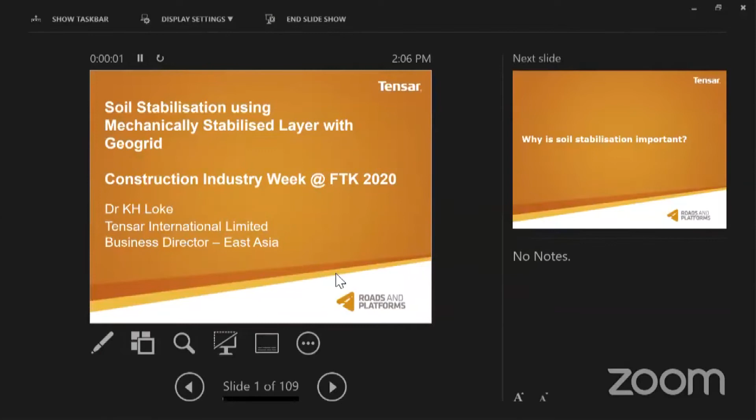So can you see my screen now? Not yet, not yet. Let me just, or should I share my screen? Hang on. Okay, I thought I already shared my screen. One more time, can you see now? Yes. Okay, now you should be able to see. All right, that's good. And I'm just going to do, what do you call that, display setting, duplicate slides. Right, so you can see the big screen right here. Let me just hide the video panel so that it's very clear.

It is very exciting to see a lot of invited guests in this construction industry week. It's a great organization. Congratulations to the team for putting these few days of organization together, and I think this is a great effort. Again, my congratulations to all of you who have made this happen.

So the topic of the presentation today is regarding soil stabilization using mechanically stabilized layer with geogrids. Now the topic itself has got several key phrases, for example, soil stabilization — I'd like you to remember that word very carefully. The other word I'd like you to remember is mechanically stabilized layer.

And lastly, the word geogrid. Don't be discouraged if you don't understand what geogrid is. I will show you some examples, and in this presentation I will go very slow. It's a structured presentation, and I'll show you a lot of videos of the application as well.

The question here is, why is it so important to have soil stabilization? We talk about ground improvement, we talk about reinforcement - those are beautiful terms, synonymous to ground improvement. But not many people have really heard about soil stabilization, or the word stabilization is used wrongly. This is what we try to correct, or what will be the objective of this presentation.

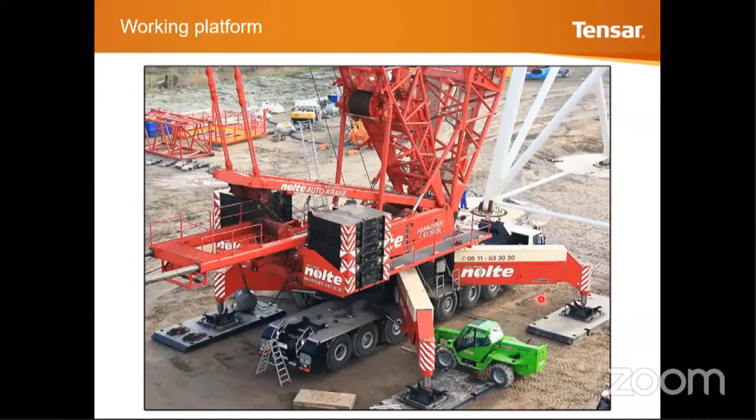So why is it important? You may come across applications like working platform. You can see here the working platform. If you compare the size of this truck, just imagine how small a human being is compared to huge machinery like this. If you do not have a firm foundation or working platform, you will not be able to support this vehicle, and it will just collapse and not work. That is why stabilization of the ground is very important.

In fact, you may ask, is there a design or guide for working platform? The answer is yes, there is a design, and I'll show you one example here. This is the European Federation of Foundation Contractors, the EFFC/DFI - DFI simply stands for Deep Foundations Institute. So you have a document here to teach you how to actually design a working platform.

What is interesting here is this little picture. This is a European document, and if you notice this picture - I don't know how many of you would notice - when I checked back the record, it shows that this picture is actually from Malaysia. It is actually a tragedy that happened back in 2016. Unfortunately this is quite common in the construction industries we are facing in our country.

You can also see in that document, if you look at the appendices, a ground engineering magazine talking about bearing capacity of a geogrid stabilized granular layer on clay. So there is a design method already in place, published in 2019 by Lee and Matthias. It's not uncommon that we don't know about geogrid stabilization, yet it's already a published document. Any students graduating soon and coming into the industry, I would strongly advise you get hold of this document.

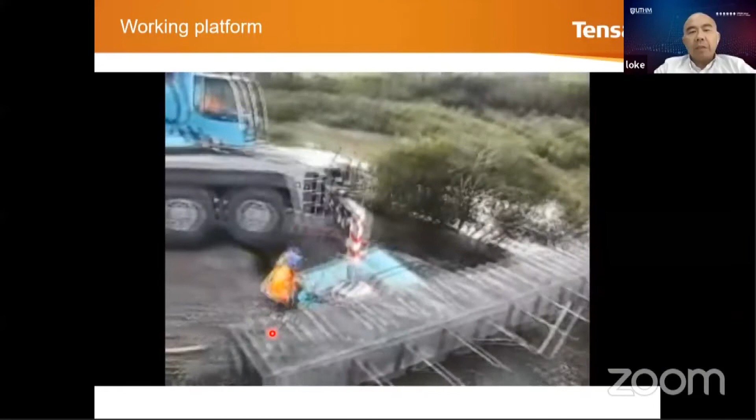Then you have a problem if you do not really take care of the foundation or working platform where the heavy vehicle is going to be supported. So you've got conditions like that - this is really heavy equipment, a construction in a wind farm. I'll show you why it's so important to have a good working platform, because it's going to save a lot of time as well as money.

And also for subgrade stabilization, you can see rows of geogrids have already been laid out over very, very soft material. This is actually a project in Korea, whereby the client is trying to develop an industrial area, but getting access to the site is completely impossible.

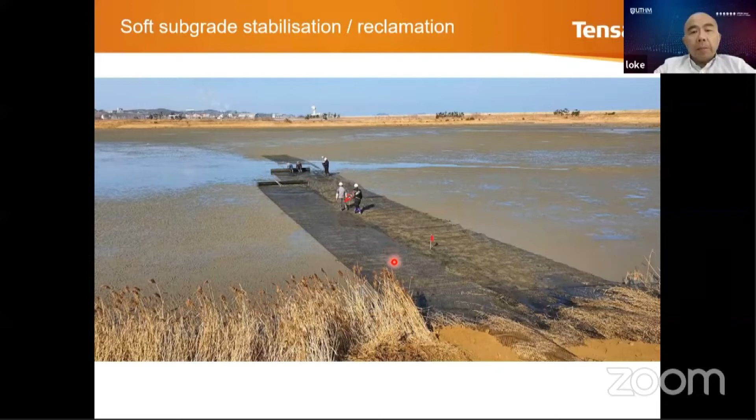What has been done here is to lay a geogrid. You can see the footprints over here. I may have some other photographs to show you later on, for road constructions. And if you notice, these are all the loading coming from the top.

So your geogrid is laid, this is how the geogrid is laid. And then you have got your construction vehicles lying on top, and you use your aggregates or the base course material, which is a very good material. And there are reasons for why you're using such a good material over the geogrids.

So this is what we're going to talk about in our presentation today. We're going to look at the performance review. It's very important - the word performance here is actually the most important thing.

Sometimes if you look at the whole design alone, you have to depend on what we call empirical design. Empirical simply means that you run real trials and you look at the results. You can't actually make an equation or have a formulation - it's quite impossible. And through the performance, then you try to make a formulation out of this. That's why we talk about performance.

A lot of projects, for example the design of road pavement, is all purely empirical. And so is design of geogrids for pavements. It's all purely empirical. In other words, we put the road to a test.

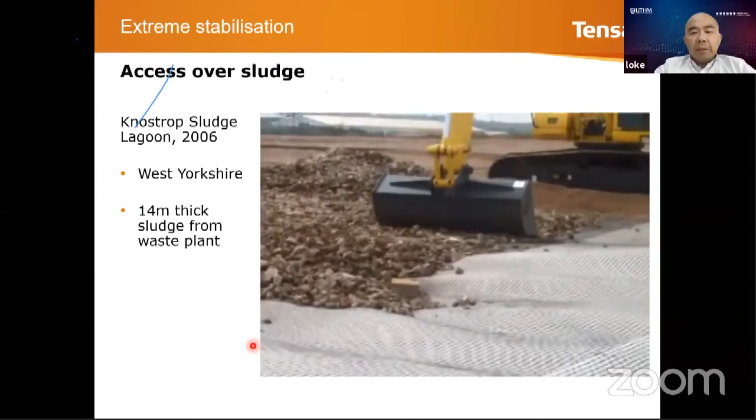And you can see that this is a geogrid, and you also have what we call a load, and you have got construction vehicles over it. Okay, and you can see that the soil is very, very soft. Here is again another performance.

So in this layer, I'll just stop it for a while. Oops, sorry, just go back. If I can just provide you some background.

So here is only about 300 millimeters of fill aggregates, and below is actually a layer of geogrids, the one you saw in the train ballast. And further down, if you see this particular dump truck, this is about 55 tons.

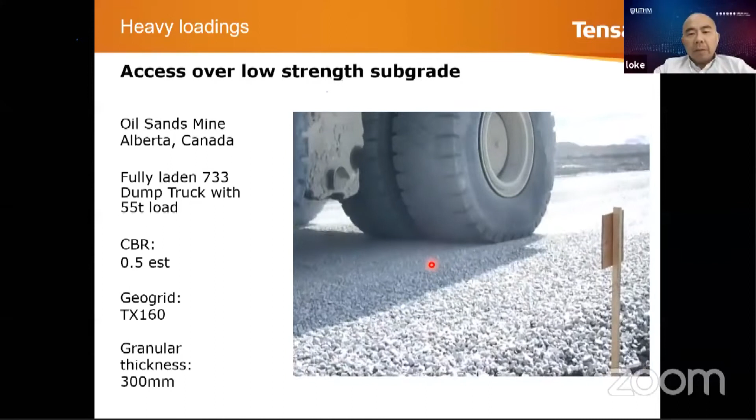So you don't see any movements of the stones at all here, it's very stable. And the section without any geogrids, you can see that you have got a lot of rutting, trucks simply wouldn't move at all. Okay, so there's a big difference.

Here, the stones are all displaced, but the stones over here, whereby you have got geogrids, the stones are not displaced at all. They are confined, interlocked, held together, and they don't move. If you look at the stones here, they are completely displaced, and when they are displaced, they become thinner, and therefore the aggregates will not be able to support this particular vehicle anymore.

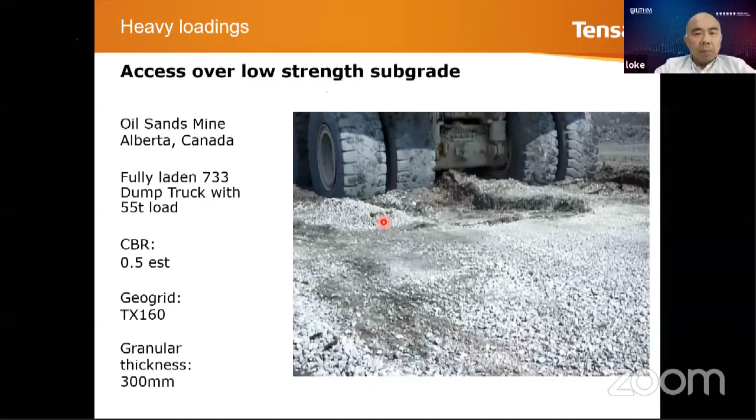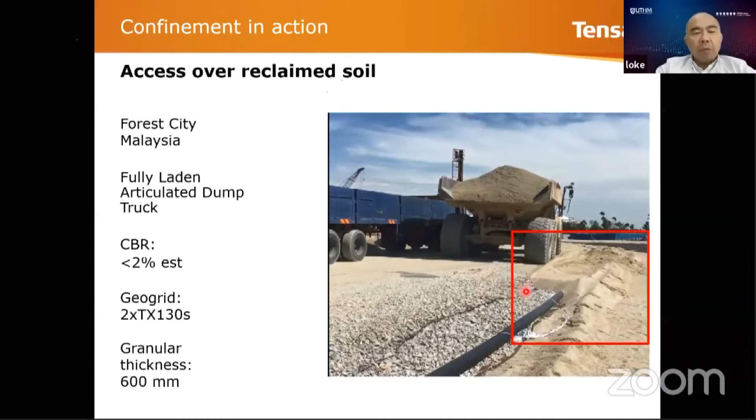And you can see that the vehicle is very close to the edge. And even though it's very close to the edge, you can see very little movement from moving away from the roads. So very little movement of the stones moving away from that pile. Okay, so that's what we talk about as performance.

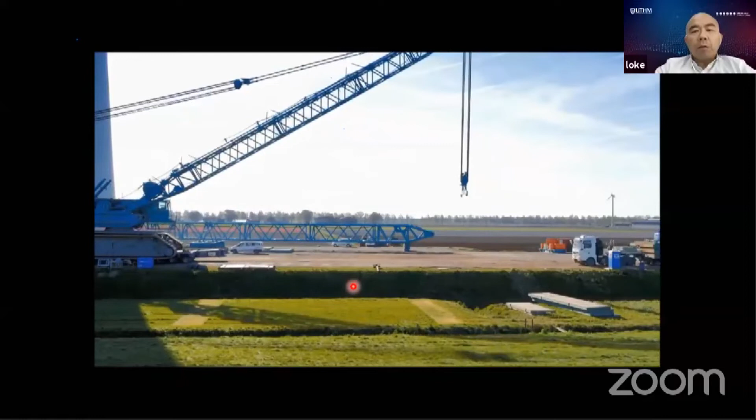Now, this is also a very interesting project. I showed you the big vehicle earlier. For this particular vehicle, to mobilize and demobilize, it will take you 14 days. So you got to dismantle this vehicle. You have got these trucks transporting all the parts to another project site in a wind farm, and then they have to reassemble it again. So the mobilization and demobilization part takes about 14 days.

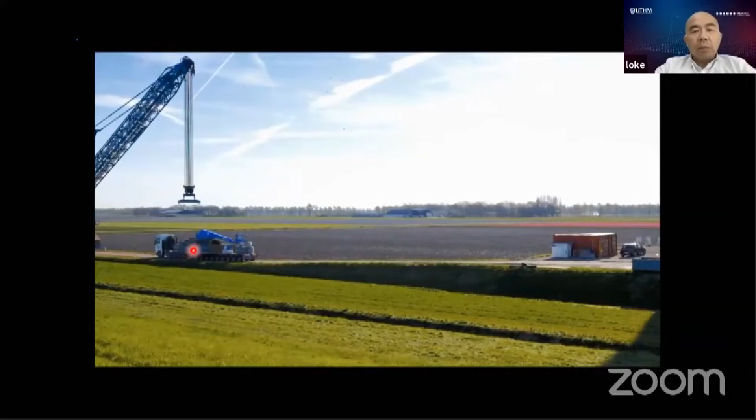Now, with the geogrids that we can actually provide for a good access road, this machine need not demobilize. They can actually move on the road. And you can see this movement. If you look at the size of a human being, it's very small. Even this truck is very small compared to this giant, which is actually used to carry the wind turbine. All right, so this project is actually in Holland.

There are numerous case histories to show the workability of soil stabilization using geogrids. So what geosynthetics are normally used in roads? This is an important question that we normally ask. And I just want to show you some of the geosynthetics.

So typical solution is that if you have a soft clay, you step over it, you will sink. And if you know that if you have got a wooden platform, you step over it, it will actually float. And the reason for that is because this wooden platform is able to spread the load to a wider area and therefore reduce the pressure, and then it's allowed to support the load. Now, remember that this wooden platform is one whole homogeneous piece, it is intact.

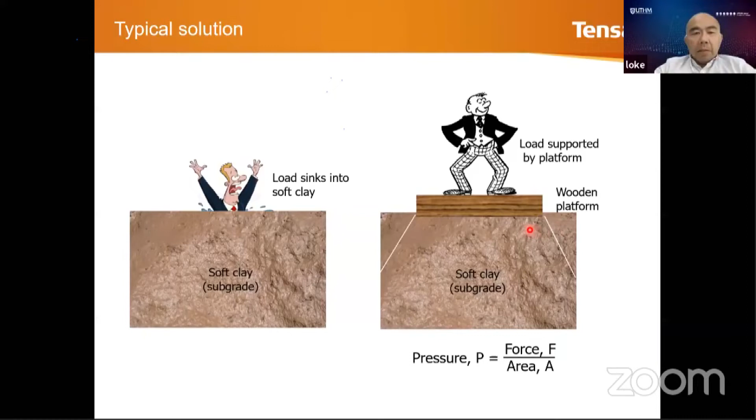But when you talk about a material which is basically a fabric, a geosynthetic, if you put it close to the soft subgrade, you will still have the similar effect, provided that these geosynthetics will not deform. And in most cases, if you put a layer of geosynthetics here, it will deform in this manner when it is loaded. So when you have got loading, it will not be straight, but it will deform like this.

Only when it deforms, then only it will mobilize the tensile strength, and then it will be able to support the load. Okay, but a lot of engineering drawings, you will see that it is a straight line. It doesn't work that way. This is exactly what is happening when you put a geosynthetic material in between a soft ground and a sub-base material. You will have to deform.

The question here is, do you want to have this deformation at the top? Can we tolerate that kind of failure? Right, that's the question. And in most cases, if you are looking at the working platform, if you are looking at heavy crane access, or for roads, paved roads, we cannot tolerate that kind of huge deformation.

And that is why we must have something which cannot deform so much. It's very important to identify the geogrids or the geosynthetics that will help you to do that.

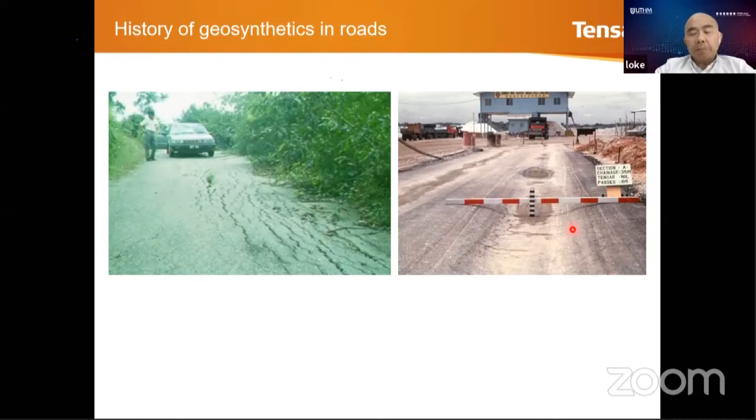We cannot have this kind of performance, especially for important structures like pavements, heavy duty pavements, cranes, access working platforms. We cannot have this kind of deformation. So let's look at the variety of geosynthetics.

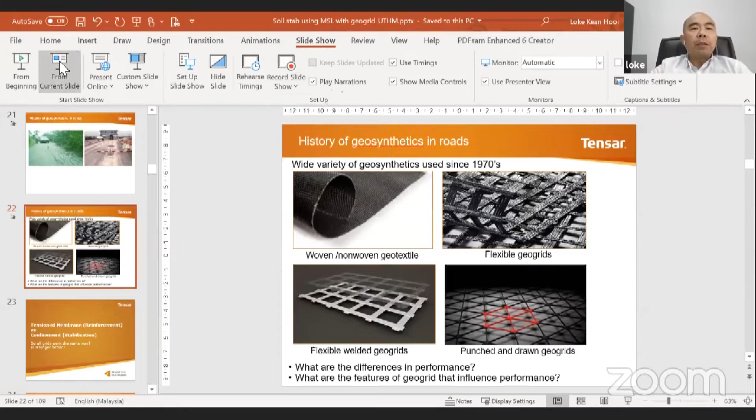So the most important thing here is to look at the junction. You can see the junction here is very strong, same thing as this particular junction. So if you imagine a road which is carrying vehicles and the vehicle is coming from the top, you know that when you have got something at the top, it will deform.

So it's very important that we look again at the mechanism of loading. Let's proceed on with the presentation, I'll show it to you. So what are the differences in performance? That's what we want to find out. What are the differences in the performance? And the next question we want to ask here is, what will be the features of the geogrid that influence the performance? What properties of the geogrid are important for the performance?

So the first one we want to ask is, what is the difference in performance between flexible geogrids or flexible geotextiles compared to stiff geogrids? And then if the stiff geogrid is better, what are the properties that influence the performance? These are the two questions we try to answer.

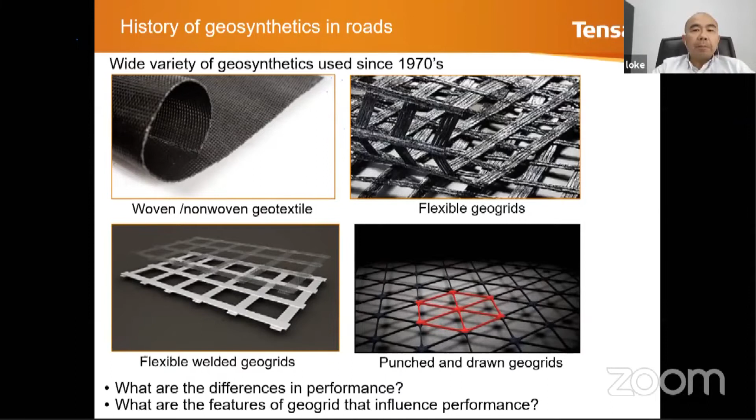So we look at tension membrane, which we call reinforcement, and the other one we call stabilization, which is confinement. So to answer Dr. Hassan's question earlier, which function is better? We will look at it and I will tell you which function is better. And again, it depends on what performance that you want.

So I also note down questions on the slide here. Do all geogrids work the same way? Is stronger better? And this is where, as engineering students, when we come out, every time we see strength we say, oh, this material is very good. If we look at concrete or steel, we say, oh, they are very strong. Is strength the criteria or is it not?

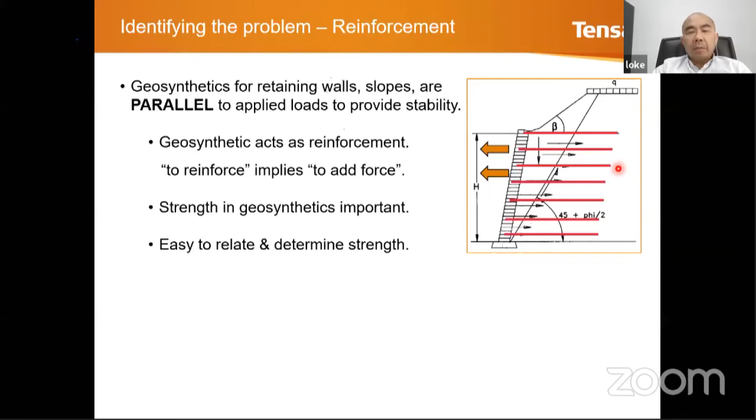If you look at the reinforced slope or reinforced wall, this is how we analyze it. Strength becomes important, so you need higher strength to resist any failure. That's what we found out in our soil mechanics class.

But for the road or working platform, it's different. The direction of the load is not the same as the direction of the geosynthetic. The direction of the load is down, and the direction of the geosynthetic is this way.

So does strength now become important? I demonstrated to you holding up the various geosynthetic, and as I press down, you can see that no matter how strong the geosynthetic is, it is not going to hold the load.

If you can still see my samples, this is my samples. This material is very strong. If I pull it this way, it's very strong compared to this material. So the tensile strength of this is more than this.

But when you apply the load this way, this performs better than this. You see the difference now. So it depends on the direction of the loading, and that's very important. This has been well researched.

You can see that it is very difficult to explain why reinforcing the road doesn't work. You don't reinforce the road, you stabilize the road. And this is very important.

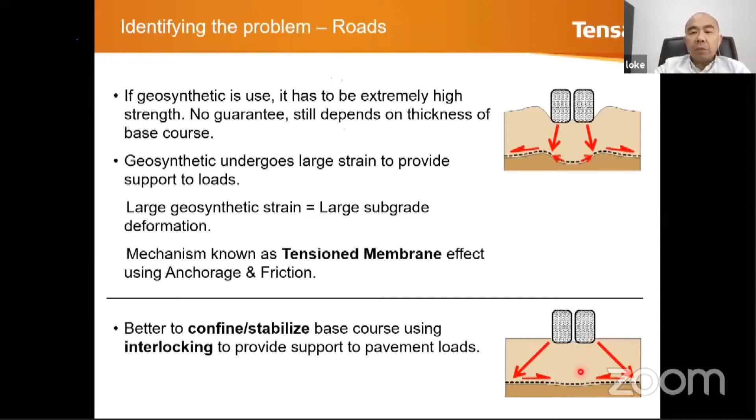How do we do that? By restricting any movement of the soil here. If you look at this, once the soil enters into these holes, it is held together by the geogrid, it cannot move. So the stiffness of this material is strong and it cannot move. So when there is no displacement, then there is no displacement at the top here where the wheel load is.

Let's look at some of the videos and it'll help you to understand better. So this is what happened, you see?

The big difference between a geotextile, which is soft and flexible, you have a tension membrane effect. If you use a stiff geogrid, even though its strength is lower than this strength, it performs better because it has stiffness and the ability to interlock. This mechanism is what we call stabilization. That's a key word here in today's presentation when we talk about stabilization geogrids or mechanically stabilized layer.

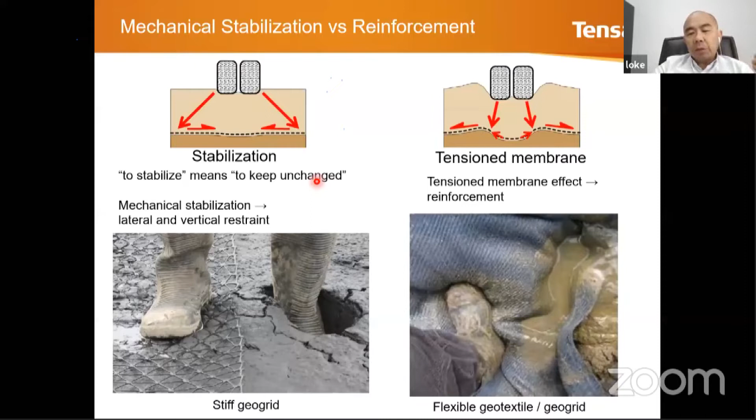So a tension membrane works like a hammock. How does a hammock work? The hammock only works when you put a vertical load. Once you put a vertical load, then the hammock started to strain and it started to stretch. When it started to stretch, this is where the reinforcement ability or the tensile strength of the hammock comes into play. But it has already deformed, okay?

And that's what we don't want. We don't want deformation, or we try to minimize deformation. So reinforcement of the geogrids will take place when you have got a tension membrane effect, when you have got reinforced soil structures. However, stabilization of the geogrid will take place especially for road construction - you need stabilization, or when you have got a change in boundary and embankment, or to limit any slip surface failure.

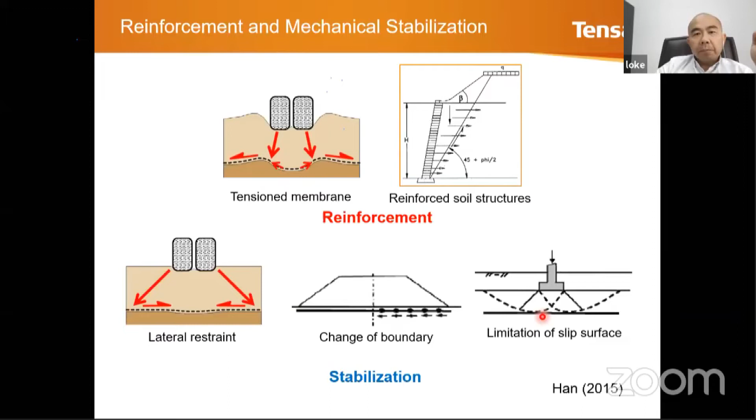How do I play these videos?

Why can't I play these videos? Yep, okay. And to position the fabric.

So rolling it out straight was almost impossible. It's difficult. And in the really soft areas, the crew found themselves in a bit of difficulty.

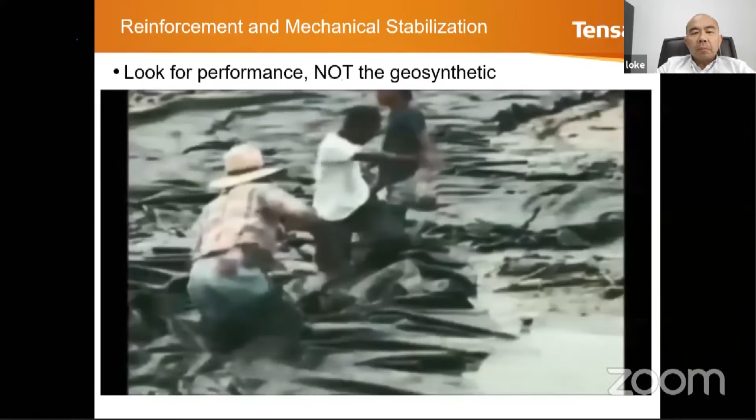With Geogrid, it was a different story. Only 2 men were needed, and it supported their weight with ease. You can imagine how difficult it would have been to try to sew the fabric under these conditions. On the actual levee construction, 1 man could position the grid, 2 roll it out and overlap it. Unlike a geotextile, no sewing is required.

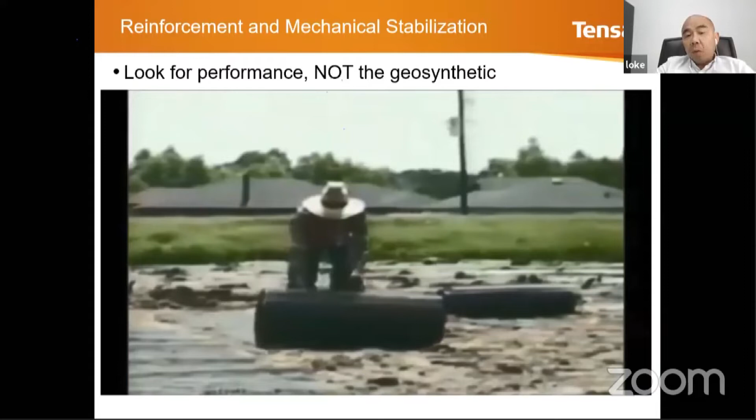So you can see the difference. One with the geotextile, which is very high strength but very poor stiffness, and you can't work at all. The other one is a geogrid, which has got lower strength than the geotextile, and you can see that it works perfect. Why? Because again of stiffness.

As long as the loading is from the top or is not in the direction or parallel to the geosynthetic, strength is not the design criteria. So do not design on strength.

Many people ask me in my whole career in geosynthetics, they take a geotextile or geosynthetic material and show it to me and say, oh, this geosynthetic material is 80 kilonewton, how does it perform? To be honest, I don't know.

All I can tell you is that if I look at the material, if it has got very little rigidity or stiffness, then it will not perform. Yet still, we have seen engineers designing for road pavements, for platforms, for soil stabilization, everything looking at strength. And strength is never in the equation.

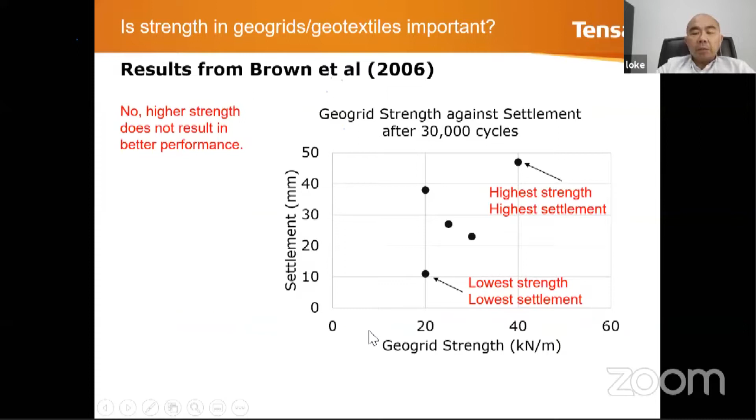So you can see here, as I've illustrated very clearly, geogrid with strength which is lower than a higher strength right here perform much better compared to a higher strength geosynthetic. So there are 2 definitions.

In fact, it's very clear, this is published in ISO 10318. So what is reinforcement function? Reinforcement function is the use of stress-strain behavior of a geosynthetic material to improve the mechanical properties of the soil or other construction materials. Remember that. It is the use of the stress-strain behavior of the geosynthetic to improve the mechanical properties of the soil.

Now look at the stabilization definition. Stabilization function is the improvement of the mechanical behavior of unbound granular material, meaning the granular materials are loose, not bound together, by including one or more geosynthetic layers such that deformation under applied load is reduced by minimizing movements of the unbound granular material. You see that? There's a big difference between the stabilization function and the definition for reinforcement.

Stabilization talks about movements of the aggregates. That means if you can restrict any movements of the aggregate of the granular material, then you have less deformation. And that's how it works in stabilization, by restricting movements of the unbound material. And that is very important. If you can understand that, then you can understand stabilization.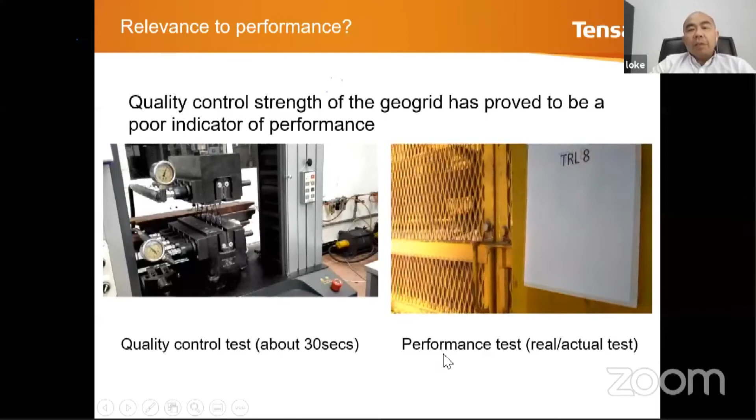This is a performance test. You put the geogrid into the soil, then you run the test. This is what you have done. You run it for many passes and then you check the rutting. What is the depth of the rutting? Is it deep? How much does it form? By doing that, you will know the performance.

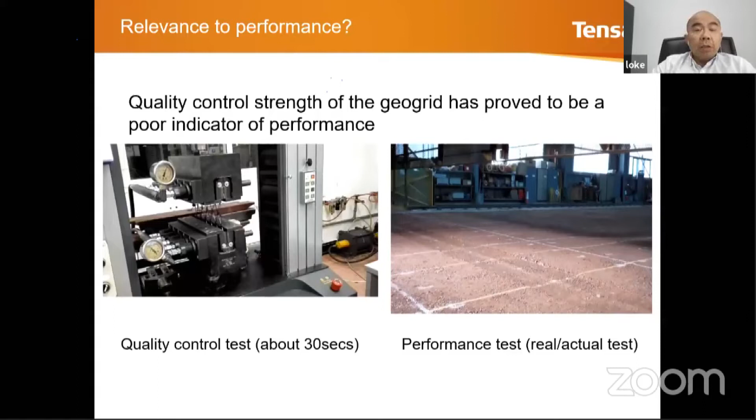So if you look at this with the geogrid, you can see the road is very flat. It doesn't deform a lot. You can draw a conclusion to say that this test actually worked. The road is still good. This is what we call a performance test.

So the key performance indicator is very clear, the answer was given to you already, it's deformation. So we look at the deformation. If it's deformed very badly, we say it doesn't work. If it doesn't deform, then we say that the geogrid works.

As I said, in the AASHTO guide you can see tons and tons of different kinds of trucks, different kinds of tandems, different kinds of wheels, different kinds of axle loading. What AASHTO did in 1958 to 1960 is run this truck up and down, there's a circle here, they run it up and down and see how it performs. That's exactly what happened in 1958 to 1960s. They just trafficked it up and down along this stretch using different kinds of vehicles, and then they formulated what we call the AASHTO guide for the design of pavement in 1993.

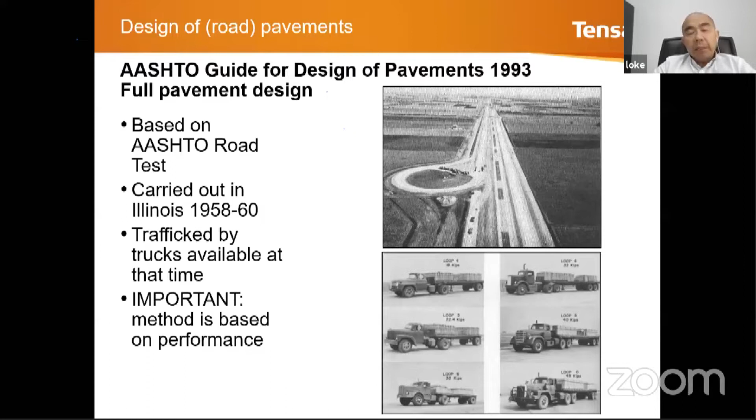And that's how, again, purely empirical, based on performance. So what we have done over the years, over 30 years, we have done more than 80,000, and sometimes exceeding about 1 million ESAL. ESAL stands for Equivalent Single Axle Load. We have done so many trials from 1992 all the way to 2014, and you can see these are all performance tests, in order to determine the performance.

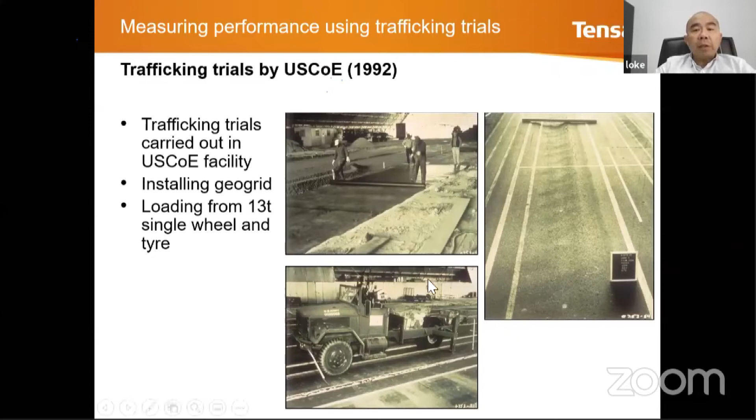So the first performance test in 1992, at the very start, what we have done is we have done it with these particular geogrids, which are biaxial geogrids. And you can see the performance right here. So these are the geogrids, the SS2 and the SS1.

You can see that if we take a deformation of about 25 millimeters, you read the graph across here. Just to give you a little bit of context, if you are using a geogrid like this, that's the PET1 and PET2. Control has got no geogrids at all. A PP geogrid will be something like that. And then you have got the SS geogrid, which is something like this.

So this is the performance. You can see that at a very small number of passes, you already have very deep rutting. Whereas with a stiff geogrid like this, you can see the rutting is at the same level, but the number of passes is much, much higher. In other words, you need more passes to give you the same rutting of 25 millimeters. So you can see here, the performance of a stiff geogrid is much better compared to a flexible geosynthetic material.

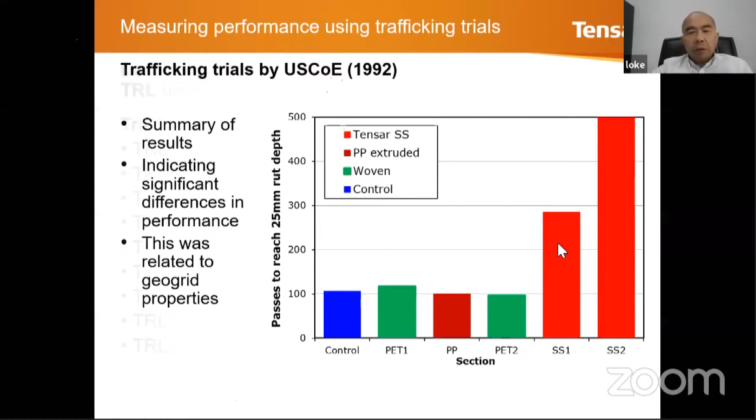And then we go into a full trial, which we call the TRL, in the UK. You can see a lot of sections that we have done, stiff geogrids and different kinds of geogrids. I've shown these particular facilities for you, and there's a lot of literature and publications of these tests.

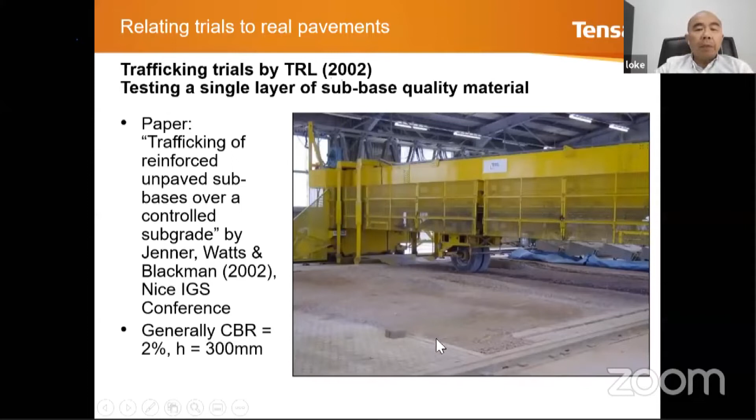These are done generally at 2% CBR, which is about 50 kPa in terms of undrained shear strength, and the thickness of the fill material above the geogrid is about 300 millimeters.

Now, if the deformation is at the top, it's still okay, because you can top it up. But if the deformation is at the bottom, it will cause more failure to the structure, because you cannot top it up - you've got to dig it down and repair that section. This is what we try to avoid.

All right, so from this technology, science has developed and moved into this particular technology. So why do we have a hexagonal shape?

The reason we have a hexagonal shape is because as a wheel load is exerted upon the geogrids, it's actually generating a radial stress, and a hexagon is very close to a radial stress, round. That is why the geogrid is formed in a hexagonal shape.

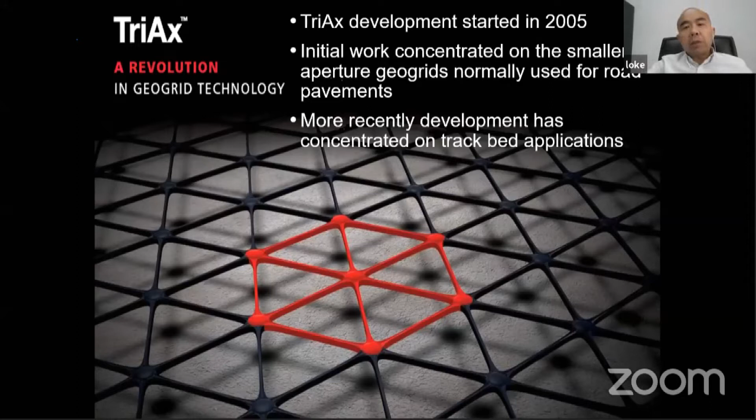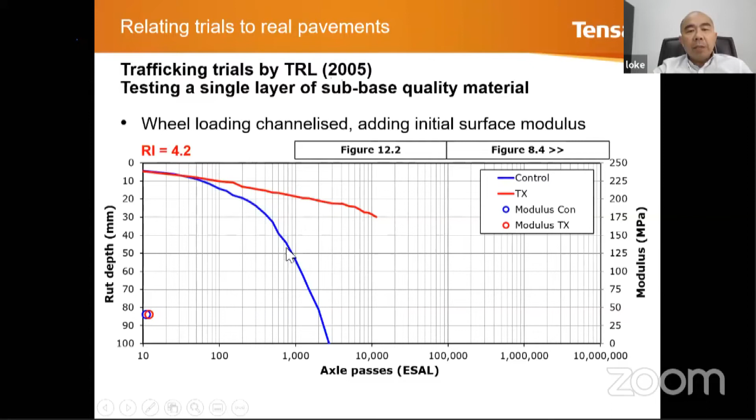So you can see that this is very clear. This chart is plotted against gross loads, whereby you have the number of axles. So when we talk about a permanent road, we are talking about in this region. 10,000 passes is still quite low - you can see if you don't have any stabilization geogrid, the road already failed.

All right, so there's a difference now. The control, you can see, failed very fast. Then you have a square type of geogrid, which I showed you, which is not performing so well. And then you have a triangular or hexagonal shape of geogrid, and it performs much better.

You can see that if you take a 25 millimeter settlement deformation, it performs about 6 to 8 times far better than the square geogrids. This is the technology we want to share with you in this presentation.

So we moved on now to a more critical or higher loading, and this is where we use the US Corps of Engineers trial. In this trial, you can see this big truck moving along the road.

And inside here you can see this mechanism moving - this wheel is moving inside this big truck. It's a very expensive test, but a very important test. We call it the APT test, Accelerated Pavement Test.

This is a very important test because you can perform it in a controlled environment - you can control the moisture, control the temperature, and allow the wheel to run not channelized. You can run here and then move to the other side and run again. You can construct a road, and after that drive this vehicle over the road and perform the test anywhere you want.

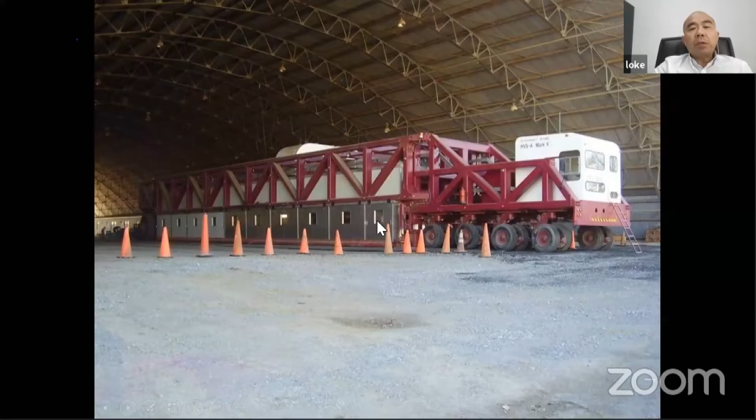So inside this particular truck, this is where the wheel is. It's a very heavy wheel and it's not channelized. In other words, the wheel can run in this track or it can run in the track later on, so it can vary the tracking. The wheel can run along here or run along here or run along here.

So this is the test, and these are very interesting results. What you can see here is a control section with 50 millimeters of asphalt. The deformation, the rut depth, is 50 millimeters after only about 20,000 passes. And then you increase the thickness of the asphalt to 75 millimeters - it doesn't help at all. At 20,000 passes, it has already developed about 20 millimeters of rutting. And remember, you increased it by about 50% in terms of the asphalt, and asphalt is very expensive.

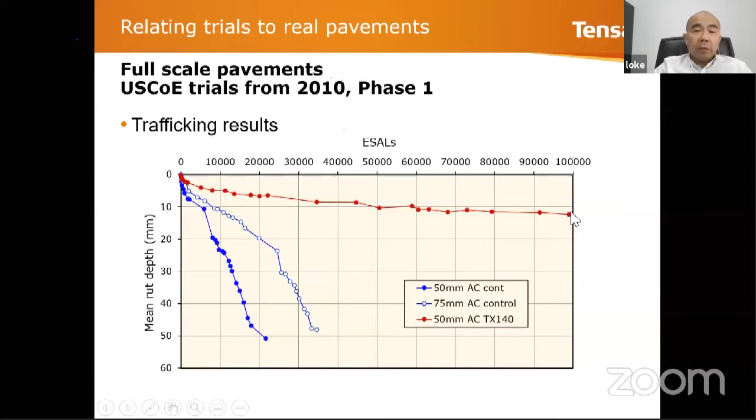What you can do instead is add a layer of geogrid. Using 50 millimeters of asphalt, you can see that it can go on until 100,000 passes with a rutting of less than 12 millimeters. And that is a very interesting and well-performed trafficking result. So you can replot these in the Austroads chart.

We carried out another test, this one with the Louisiana Transportation Research Center, and this goes way beyond the 100,000 passes, which is right here. What we did here is a plate load test, up to 4 million passes, and this is the real McCoy, if you like. This is where the real things are happening - the actual roads happen around here, not here.

You don't have a road whereby the number of passes of traffic vehicles is less than 1,000. And this is where you can see again, we have somewhere about less than 15 millimeters of rutting.

So I mentioned to you what I mean when somebody comes to me and says, 'I've got an 80 kilonewton tensile strength geosynthetic material, how does it perform?' My answer to that question is, I don't know, and I tell you it won't perform - it will rut. But if somebody comes and tells me, 'I've got a geogrid which can interlock and has very good radial stiffness, how does it perform?' I can tell you, most likely you will have rutting not more than 20 millimeters after maybe 100,000 passes. And this is what we experience, and these are the results.

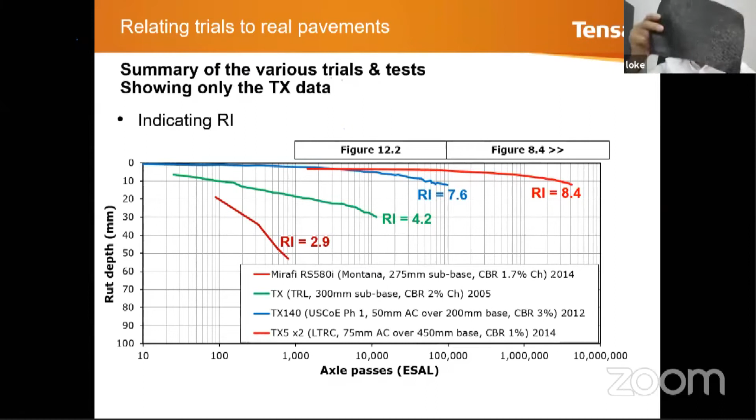This material has got higher tensile strength than this material. So what is the magic? That's what we try to explain to you.

Let's look at mechanical stabilized layer explained. This is the real show. Why is a geogrid, which is stiff and has got holes so we can interlock, perform better than the geotextile which does not have holes and which is flexible? Look at this, it's a very interesting demonstration.

If you look at these two, the first thought you would think is this looks like a stone. Indeed, it is a stone. But actually it's made from plastic and shaped like a stone, and inside this plastic we have got translational sensors and rotational sensors. This is how we try to simulate rock ballast for railway.

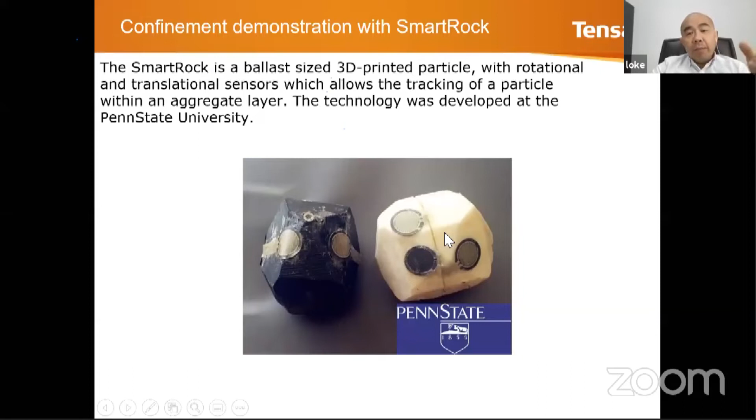So when we have got these stones, we can track movements. This research was done actually at Penn State University, and I just want to show you this video.

Look at it very carefully. Let me stop this first so your eyes won't get distracted. You can see that as I turn the rock, I can look at it on the screen. So if I do a rotation of the rock, which has got sensors in it, you can see the rotation of the rock on screen. Now if I do a translation, jumping it here and there, you can again see the movement of the rock on the screen.

When you look at this, you will say, wow, this is fantastic. Why? Because now you can actually see what actually happened in the road. If I take these rocks and put them together with the real rocks in the road or in a railway track ballast, I can actually track the movements of the rock. And this is exactly what we have done.

If you look here, this is a piston, an actuator. Let me stop the video for a while. We applied this on the railway track, and these rocks are placed directly above, about 10 centimeters above the geogrids. In one layer, the rock is placed where there are no geogrids, and in one section we place the rocks directly above the geogrid, about only 10 centimeters above it.

So what are the features that influence geogrid performance? We also ran tests at the University of Nottingham, and for those interested, there's plenty of literature to read. So why does a square geogrid not perform as well as a hexagonal geogrid?

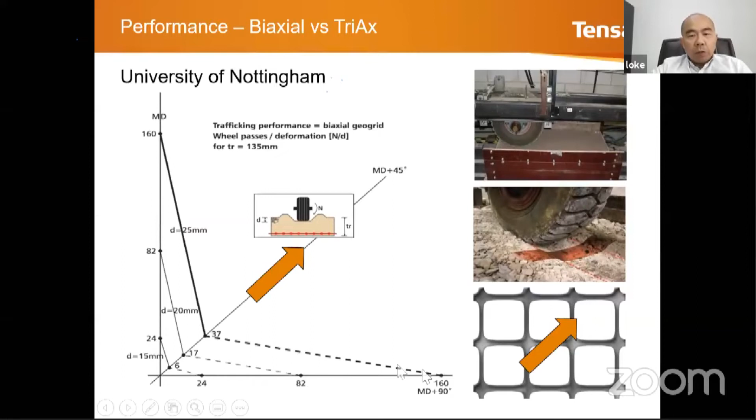If I take this quadrant and make it into four quadrants, I get this shape - you see this, which is the same as this. And if you look at this one quadrant for square geogrids, and put it into four quadrants, I get this.

Remember, there are two questions you want to answer. First: what is the performance of the geogrid, and what are the differences in performance? Second: what are the properties that give you better performance? We already know the answer to the first question - a multi-axial or radial geogrid performs better. So the second question is: what properties drive that performance?

The properties we need are: number one, you must have radial stiffness. Number two, you must take the ratio between the higher stiffness and the lower stiffness. That ratio must be more than about 0.75.

Maybe I can explain this better using a bicycle wheel. A bicycle wheel has a tire wheel that's very thin - if you look at a racer bike, it's very thin. Someone weighing 200 or 250 pounds can ride on it and the wheel doesn't collapse. Why? Because the bicycle wheel, even though very thin, is held together by what we call the hub.

You can see all these wires - this is called the spoke. The spokes are very thin but connected to the hub very strongly, and each spoke has equal stiffness. Now imagine if one spoke has low stiffness, or if this junction connection is poor - the whole wheel will collapse. That's the reason why the wheel, being so thin, is able to support a load of 200 pounds.

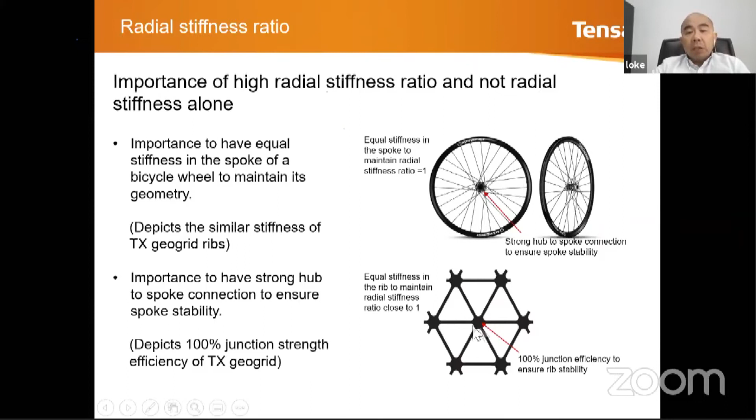And the third component of properties, which is very important for the geogrid to function as a stabilization geogrid, is junction efficiency. A wheel load exerting radial stress, and that radial stress must be taken by a radial geogrid, or close to a circular geogrid. And that's exactly why it performs over and over again better than high-strength geotextile or a square geogrid.

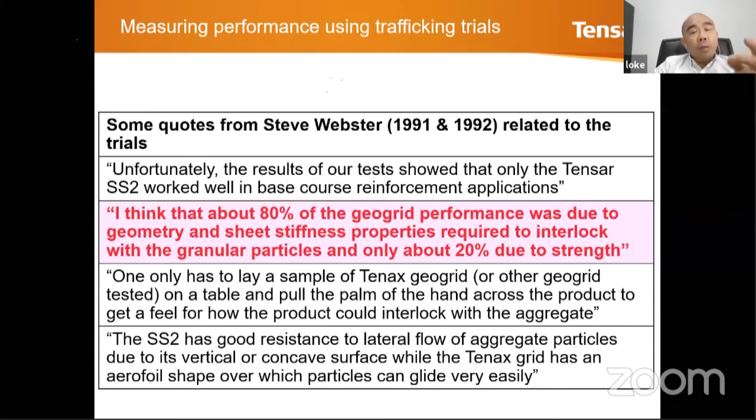Okay, so again, many tests for verification - this is one done by Steve Webster way back in 1991 and 1992, and it says 80% of the geogrid performance was due to geometry and stiffness properties required to interlock the granular particles, and only 20% due to strength. Look at this statement, a very important statement. It says that 80% of geogrid performance is actually due to the geometry and stiffness that requires interlocking of the granular particles, and only 20% is due to strength.

Okay, so the rib is important. The opening, or what we call the aperture, is very important. Square is better than round. You can see that the openings or apertures are all square - you can feel the edge here. And then you have a very high junction efficiency. Obviously you must have some kind of stability, some kind of strength. Only about 20% of the strength is enough.

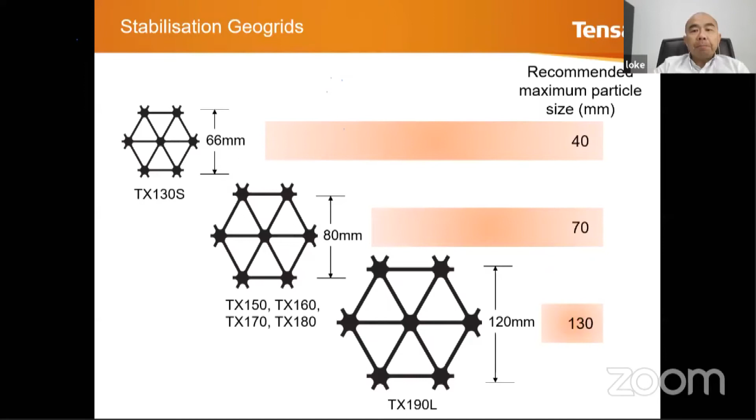Right, so that's how it looks. And it comes in different sizes as well, so you can use it to be compatible with different aggregate sizes. Here is the smallest opening size, which is about 33 millimeters from here to here. Then this is about 40 millimeters. And the largest one, which is 60 millimeters, we use for ballast railway track. It's recommended for different sizes of aggregates that you put on top of it.

So I've spoken about the performance. I've run through the tests, showing you the test. Now I'm going to talk very quickly about the design part. So how can we design it? Is there any way that we can design it? How do we get help? Yes, it's already been established.

So you can see that now we know: if I take a granular material unbound and add it together with a geogrid of this configuration, I get a composite layer. This is what we call - and this is very important to the topic - mechanically stabilized, MSL. So this becomes a composite. We call this mechanically stabilized. What do we stabilize with? We stabilize with geogrids - this is synonymous with when we add cement or lime.

You may have heard about chemical stabilization, where we add cement. So the difference between the two is that this does not add cement or any lime or any chemical - it just adds a layer of geogrid. This is why it's called mechanically stabilized.

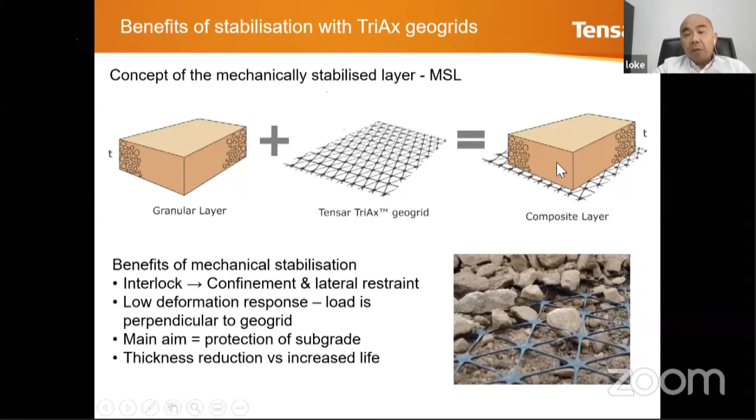Okay, so by putting a layer of geogrids, you can see that the layer at the bottom here will be interlocked. It can't move. Stiffness is there, stiffness is as good as original. When there's no movement - again back to the definition of stabilization, when you have limited movement, no deformation of the stones at all - you can see the movements in the Penn State University video. When there's no movement at all, this whole material is very rigid, and therefore you get minimum deformation.

So when we use this, we can actually save a lot in terms of construction time and also material cost. Instead of using a layer which is 1.5 or 2 times thicker without any geogrids, we can use a layer which is thinner, half the thickness, and it performs much better by giving you a better number of traffic passes.

All right, so we can design it. What we do here is we have a factor for structural number in the design. I'm not going through the detail, but just to let you know the design has been established already. So here is your soft subgrade, and this is your base course material, and normally you put an asphalt pavement over it. This is the normal construction.

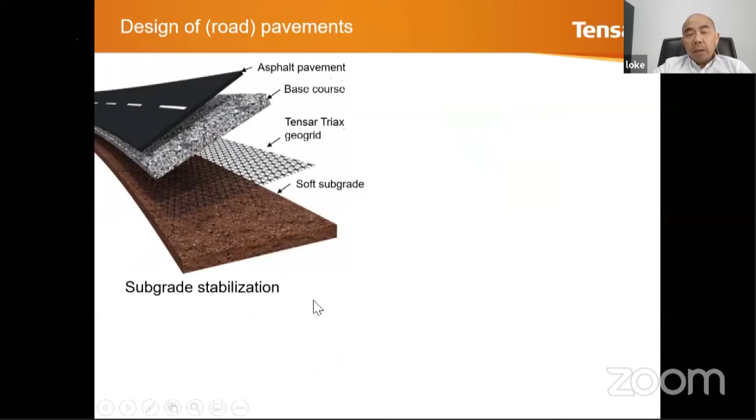The new technology is that we put a layer of geogrid directly underneath the base course. This is only one layer for subgrade stabilization. If you want to do a pavement design, which we call pavement optimization, you put two layers: one directly above the soft subgrade with the sub-base material, and another layer of geogrid in between the base course and the sub-base material.

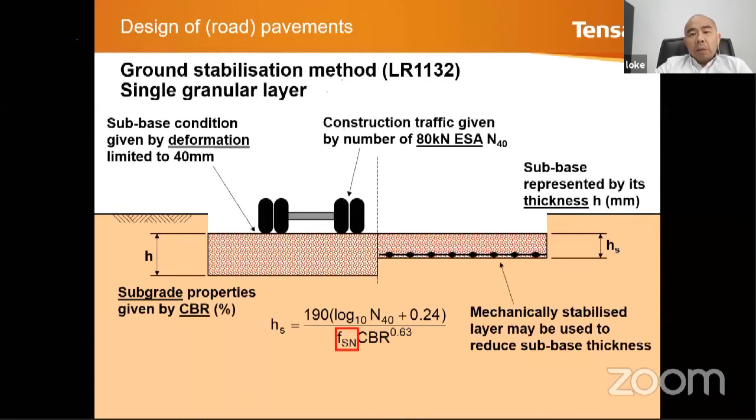Now, if you talk about pavement optimization, this is the AASHTO method. There are AASHTO guidelines, which you have seen already, from 1993. What we have done here is incorporate the geogrids using the FSN value as well. So here you can reduce the thickness of the base course, or reduce the thickness of the sub-base course. In this section, this is without geogrid, and in this section, this is with geogrid. The formulation is all there; if you want details on all these notations, you can refer to the design guide.

And here, if you put a geogrid, you can reduce the thickness of the sub-base material. And if you put a geogrid right here, you can also reduce the thickness of the base course material. Now these are actually good materials, high quality fill, and they are expensive. So by reducing thickness, you save on material, and you also reduce carbon footprint.

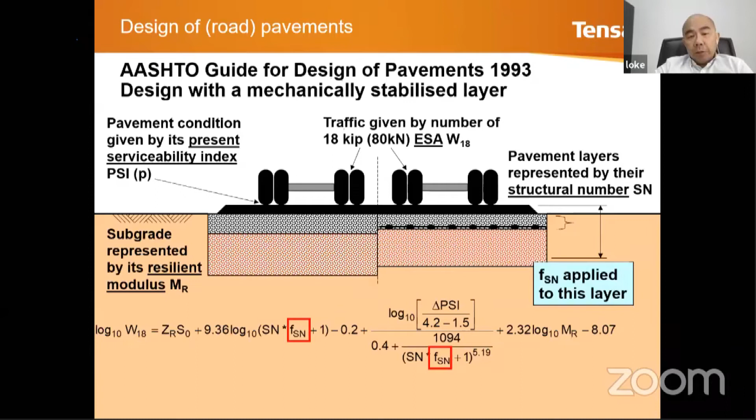And again, it shows it to you. You can see the number of passes is the same performance, but the thickness are different. You are reducing it more than half, almost half. So 150 against 284, 310 against 310 is the same, but you can also reduce this further.

Or you can keep these the same and yet still using the geogrid, then you can increase the number of performance passes. I repeat, if I maintain the same thickness as a control section, I can still incorporate geogrid, and by doing that, I will increase the number of passes to maybe about 6 times more. Instead of 5 million passes, it can be about 30 million passes. And that's the benefit of adding the geogrids.

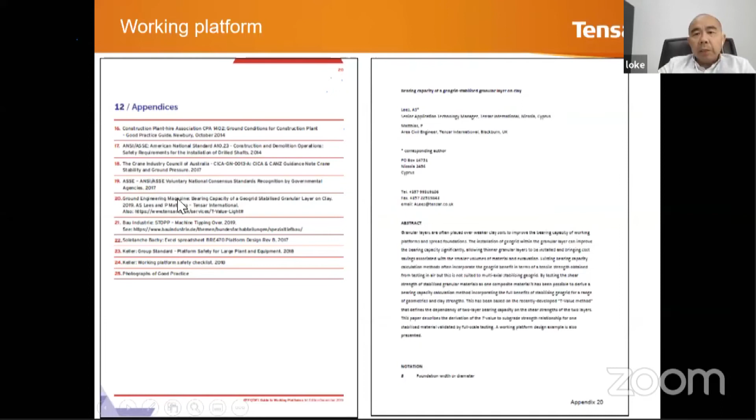I'd quickly like to show you the installation part, and then I'll wrap up with a summary, and open the rest of the time for some thoughts and reflection on what we have discussed today, and also try to stimulate you to think by giving you these 3 questions.

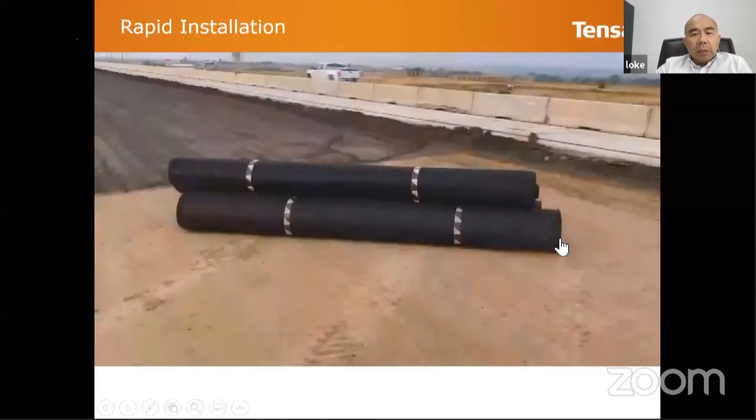So let's look at the installation. Installation is very simple. The geogrid comes in huge roll sizes, 75 meters to about 3.8 meters wide. You can see how the installation is actually taking place. So you prepare the ground, and you can see the black stuff are all the geogrids. This is about 3.8 meters. You unroll it and you just kick the geogrids. One person is good enough to do the job, and you can see that it's very easy to unroll.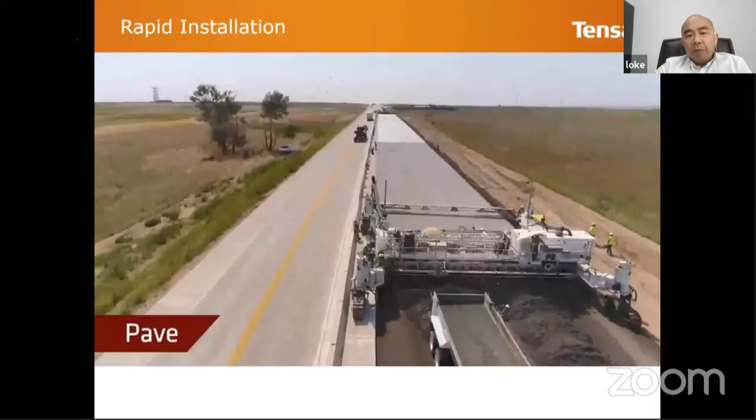Once you have done that, you put your sub-base material over the geogrids and compact it properly. If it is for pavement, then you put another layer over the sub-base and top it up with a base course material. So this is for paved roads, and at the end of the day you finish with the asphalt concrete. So it's very straightforward, and it can be designed.

Let's talk about the summary in terms of looking at performance properties, and how to specify those. Let's look at these 2 mechanisms again. As I said in the beginning, you have a reinforcement mechanism whereby the geosynthetic material is required to deform, and only then does it produce reinforcement. But this is not good, because if it deforms too much, then the top will deform also, and this is not good performance. This is not what we want. This kind of mechanism depends on the tensile strength of the geogrid or the geotextile.

So if you want to design with high strength geotextile, this is probably the effect you will get, and it requires friction and anchorage. You've seen the picture whereby they try to lay the geotextile in the mud and it sinks inside the mud because there's no anchorage. You need to have something to hold it outside here, you need anchorage. This mechanism is what we call tension membrane, and it requires a very high strength material, and therefore you increase the cost.

What we are saying here is look at stabilization. Stabilization does not depend on strength. None of the properties here is talking about strength. It's talking about stiffness, it's talking about interlock, it's talking about confinement, it's talking about lateral restriction or restraint. In other words, it's talking about holding the aggregates together from moving to the side or moving to the bottom.

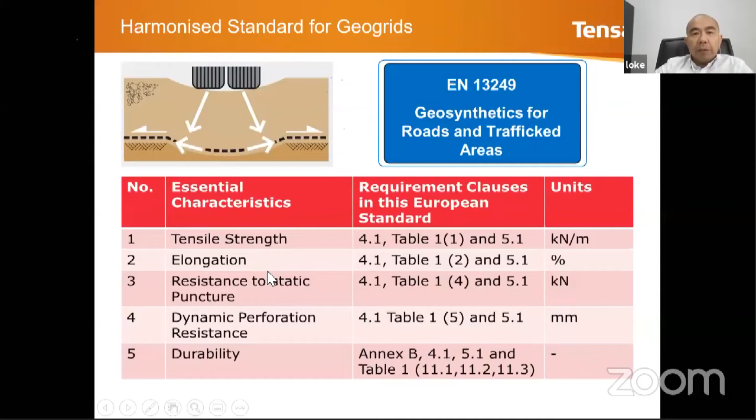So let's look at reinforcement. In reinforcement, you need strength and elongation. But when it's stabilization, strength and elongation are product performance, not functional performance. It doesn't tell you how it performs. That's why if somebody comes to me with an 80 kilonewton tensile strength geotextile or geosynthetic material and asks me how it performs, I will most probably say it will perform badly.

But stabilization is what we look at. We look at radial stiffness and radial stiffness ratio. In other words, the stiffness in different directions is more or less the same. The radial stiffness ratio, the ratio between the lowest and highest stiffness, is close to 1. So in stabilization, these are the two parameters we look at.

You cannot separate both of them. These come together, performance linked to establish geogrid performance. Radial stiffness at very low strain, 0.5% strain, is very important because road pavement will start to crack if you have more than 3% strain. So we want to restrict the strain as small as possible, down to 0.5%, and relate that stiffness by the radial stiffness ratio.

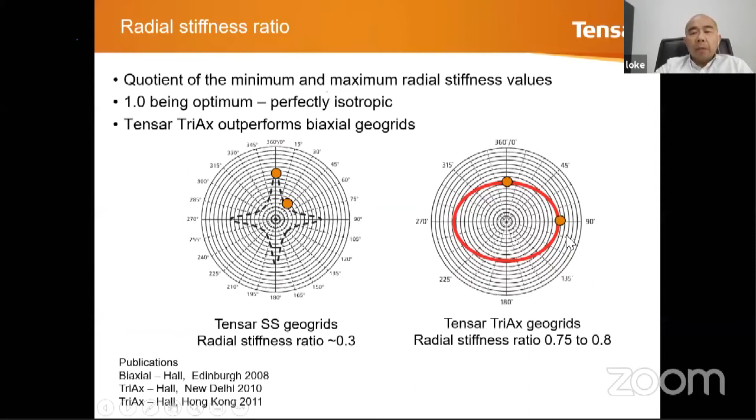So why is this so important? Let's go back to this graph. If you look at square geogrids, the stiffness ratio is very low because in the diagonal direction the stiffness is very low, producing a low stiffness. But with the multi-direction geogrid, you produce very high stiffness in different directions, and the stiffness ratio continues to maintain a very high level. These two are synonymous, tied together, you can't separate them.

The same thing here, you need high junction efficiency. And the other one is the hexagonal pitch, which is basically the hole, the size of the hole or aperture of the geogrids.

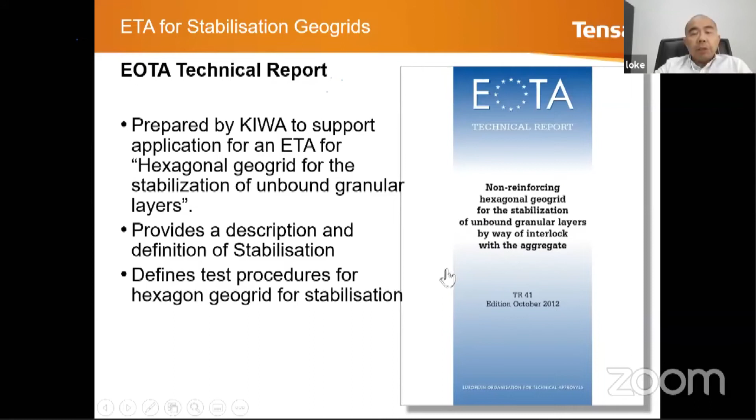There are documents already established by the European Organization of Technical Approval which spell out the description and definition of stabilization. You can see it's a non-reinforcing hexagonal geogrid for stabilization of unbound granular layers by way of interlock of the aggregates, with test procedures given in this document. There are also certifications, like Kiwa certifications, which define the intended use—to stabilize granular layers—the method of testing, and the characteristics and properties that give you that performance.

So coming back to probably my last slide, this is what I have here. These are the performance properties—properties required to perform. So two questions answered: what kind of geogrid gives you the performance? Rigid stabilization geogrid. What kind of properties give you the performance? The properties required are radial stiffness ratio and junction efficiency. It has been proven throughout this presentation that these are the properties required for it to perform.

As a last slide, I do a comparison again between mechanical stabilization and tension membrane. Fundamental behavior improves the properties by geosynthetic soil composite. Tension membrane talks about an individual structural element—the geosynthetic material is a structural element. Here we don't; we talk about the two materials, soil and geosynthetic, acting together as a composite material. The geosynthetic strain level normally is very low, giving very low small deformation. The strain level for tension membrane is very high, so it strains a lot with high deformation at the top. The load-induced stress direction is in the plane, while for tension membrane it's out of the plane.

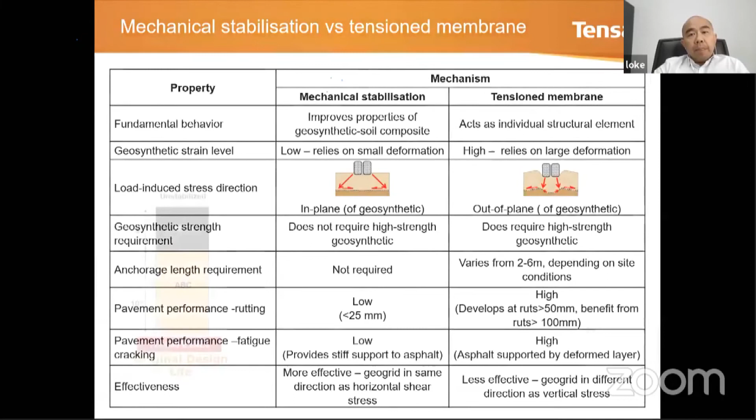So if you do a design, let's say right here, unstabilized layer, you can see that the number of passes is about 120,000 equivalent standard axle load. You have got 10 inches of base course and 4 inches of asphalt. That is the performance, okay? So the performance over time, the performance of the pavement goes down with time.

Now, if you provide a geogrid layer, you can reduce that thickness and also the asphalt concrete by 1 inch, which is still a lot, about 25%. And you still have 120,000 ESAL passes, same as the original design, but you save on cost of materials. See that? And the performance will be more or less the same.

All right, so save material, but same performance. Now, what happens if I increase this a little bit, but still lower than here? 9 inches of base course and 3.5 inches of asphalt compared to 4 inches, still good saving. I increase the life to 350,000, which is 3 times more than this.

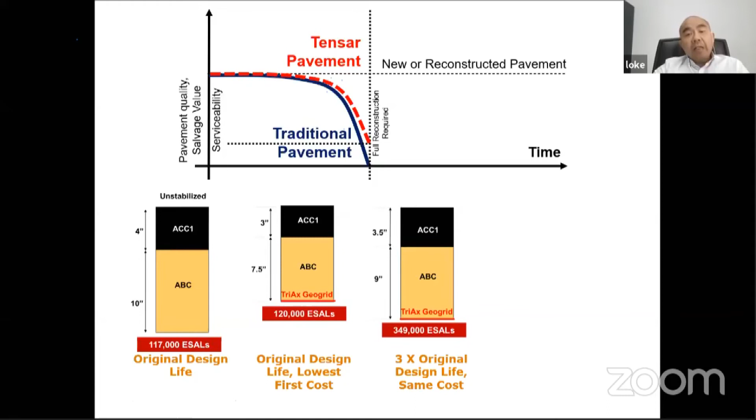So I have savings and I increase the life of the pavement, which is very good. Now, what happens if I keep the same thickness as the original? I increase the life to about 700,000 ESALs, 6 times the original life. See that? Just by using 1 layer of geogrids.

So this is where, as design engineers or as aspiring engineers coming out to the society, this is the technology that I can transfer to you and give you some knowledge of what is actually happening in the industries. And this is very appropriate that we talk about this during construction industrial week organized by the university. I hope that through these sharing sessions you have a glimpse of what is actually happening in the industry and the development in the technology of road pavement.

So what have we talked about in our presentations? We have looked at performance. It's performance, not quality testing. We have to look at performance, putting the geogrid into performance. Even design guidelines are based on performance, nothing based on theory. All right, so everything is empirical.

What kind of geosynthetics? We have talked about the different kinds of geosynthetics already. I've shown you the samples, identified the properties, and also showed you the failure mechanism, whether it's tension membrane or stabilization. We have gone through a lot of performance tests in terms of confinement stabilization. I showed you evidence of how confinement or stabilization geogrids perform much better than high strength geosynthetic materials. And then I also explained MSL, how does it work, and what properties are required for it to work.

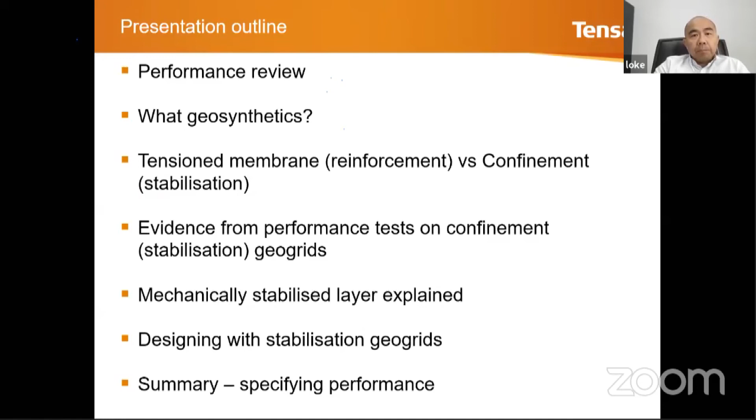Right, with that, I finished the presentation. I hope this has been a very interesting session. I have got about more than 20 minutes available, so I'll throw 3 questions for you. Perhaps I'll give you some time to think about it. And if you want to shout out the answer to me, by all means you can shout out the answer, and we will see how well you grasp these presentations over 1.5 hours.

So the first question is: what will be the effective function of geosynthetic for road working platform, soft subgrade, and railway ballast track applications? I use the word effective here because there are other functions, but I want it to be effective. That's the first question.

The second question is: define and explain the function you described in question 1. They are interrelated, so if you describe the function correctly, I want you to explain the function to me. And the third question is: what kind of geosynthetic will be suitable for the application in question 1, and what are the features of the geosynthetic that can ensure performance?

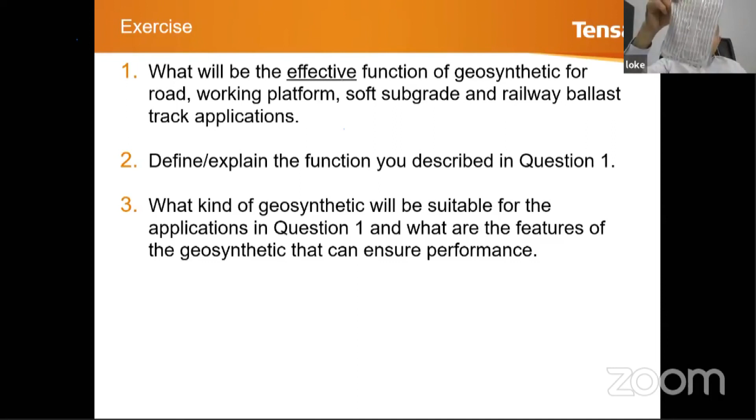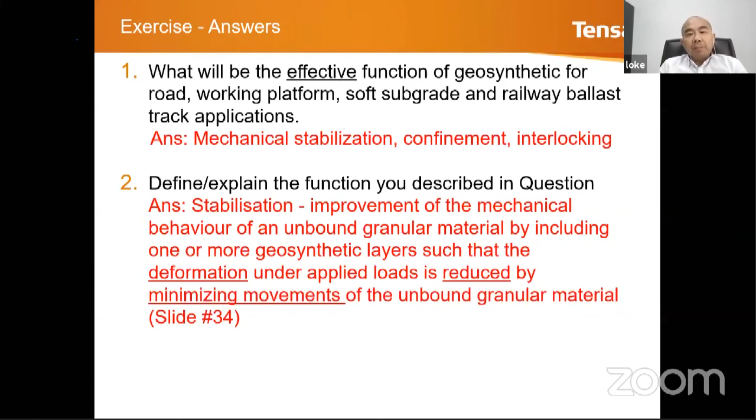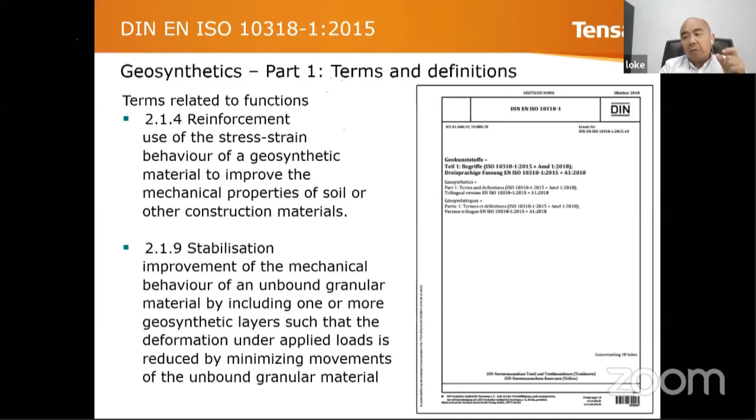So if I go back all the way again, let me see whether I can get this. Remember the two definitions I gave you in terms of reinforcement? Yeah, right here. Remember this slide? Okay, so I gave you the definition for reinforcement and also the definition for stabilization. So it's very important to remember stabilization is to reduce deformation, to minimize movements of the aggregate, which is the aggregate of the base material.

Okay, the base course or the sub-base course. And the third question is, what will be the property? So what kind of geosynthetic is suitable for the application in question 1, and what are the features of the geosynthetic that ensure performance? So somebody gave an answer earlier, and that answer is actually for the third question. It's rigid multi-axial geogrids, for example the hexagonal geogrid or triax geogrids, with high junction efficiency and high radial stiffness at 0.5%, and radial stiffness ratio more than 0.75. So if your answer is high junction efficiency, radial stiffness and radial stiffness ratio, then you got it correct.

Okay, so that will be a good exercise, and that will officially end my talk. So again, thank you so much for all the participation and the number of questions that came in. I think this has been, what do you call that, exciting.

I hope you learned from here, and if you need any help whatsoever, please go to your respective lecturers, Dr. Hassana, or you can contact me directly, and I'll be glad to help and also share with you what the industries have been doing in terms of evolving technology. We, at the forefront of the application, will know best what will be the best for industries, and that's what we are trying to do. Being an innovative organization, that's what we are evolving in terms of having more innovation in our product development. Okay, all right, thank you again to all for attending this session.